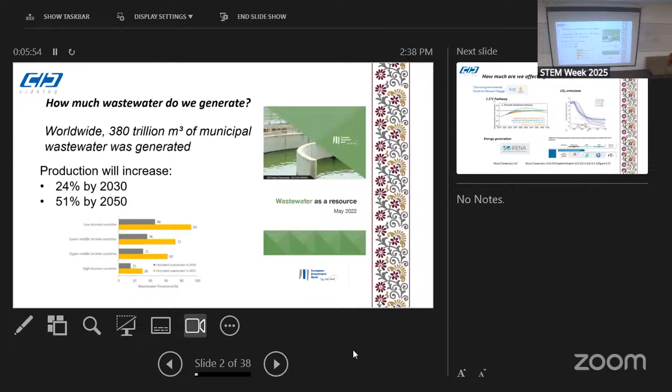Also, as you see in the document that was printed by the European Investment Bank, there is a change in the view of wastewater. We are accustomed to see wastewater as a problem, but according to this document, wastewater must be a resource rather than a problem. That's because we can obtain some benefits from the wastewater. For example, clean water, biogas, or energy, and also we can obtain nutrients. So this is a change of the point of view that is very interesting.

On the other hand, we're accustomed to hear about global warming, and it is a serious problem in our days. That's because of the production of CO2, and that's why the 1.5 centigrade pathway was implemented. There are some strategies in order to maintain the increase in the temperature of the planet at only 1.5 centigrades. That's the goal.

So we are implementing many strategies in order to decrease the CO2 emissions. One of these strategies is the implementation of alternative energies. According to the International Renewable Energy Agency, in 2030, 68% of the electrical energy must be produced using alternative energies. And in 2050, 91% of the electricity will be produced using alternative energy.

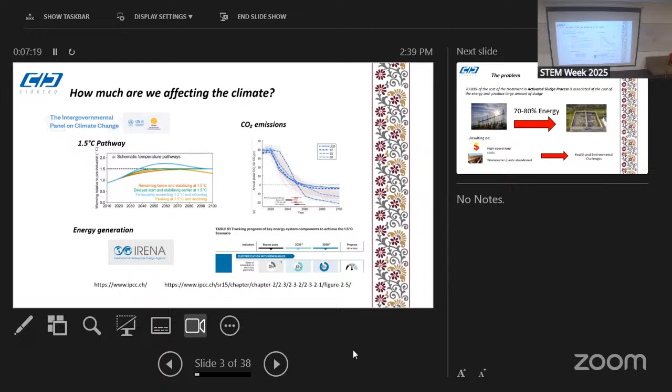Well, coming again to the problem of wastewater, there are many processes to treat the wastewater. But one of the main problems is the use of energy, because these processes require energy. For example, in the case of the activated sludge process, which is the most common process all around the world.

The cost of the treatment is associated with the cost of the energy, because between 70 and 80% of the cost of the treatment is associated with the cost of the energy required in the biological reactor. And this is important because this is the most popular wastewater treatment process in all the world. So that results in high operational cost.

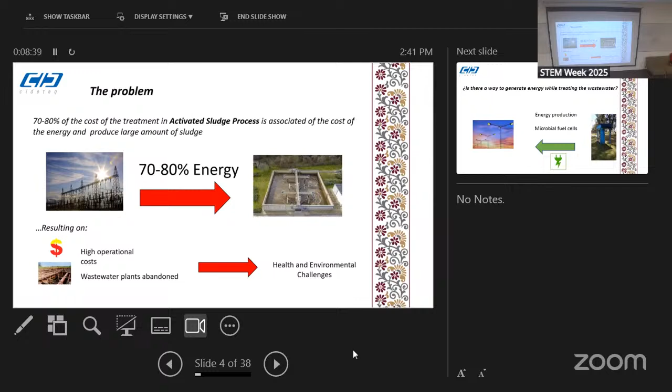For example, in Mexico, there are some wastewater treatment plants that are abandoned because they don't have the budget to operate. And that's a problem. We have health and environmental challenges. So the question is, is there another option, another friendly option to treat the wastewater? And the answer is yes.

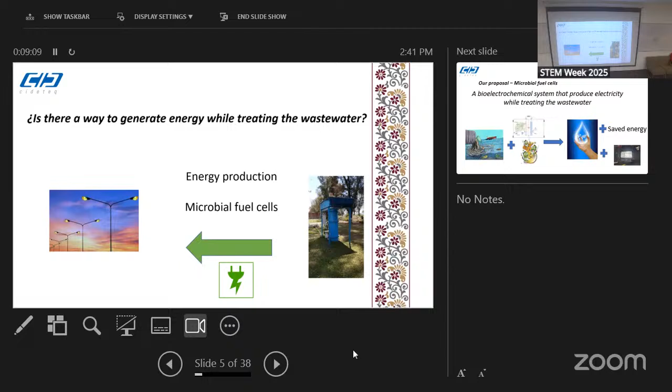I would like to show you a new approach that we are developing, a disruptive approach that is called microbial fuel cells. The microbial fuel cell is a bioelectrochemical system that can treat the wastewater, that is, eliminate the contaminants in wastewater, but also produce energy at the same time directly. That is, you place the wastewater in contact with a reactor.

The MFC is a biological system, so you have a microbial population, and the products are clean water and saved energy, because this process does not require a lot of energy. It's not intensive in the use of energy. And in fact, this process can produce a certain quantity of energy directly from the process.

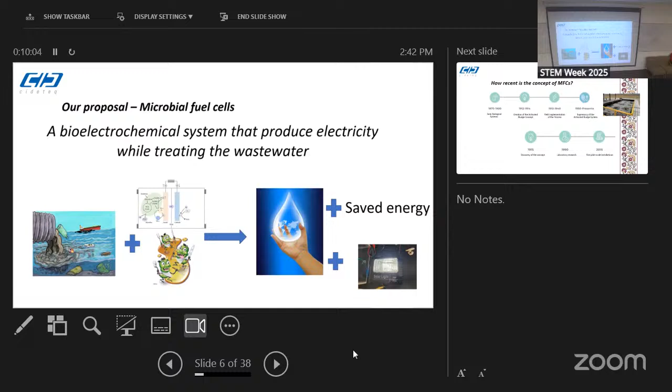Comparing this new concept of microbial fuel cells with the typical activated sludge process: the activated sludge concept was developed in 1914, and since then it was implemented in many applications in the field. And since 1950, it is the most popular wastewater treatment process in the world. Indeed, now it is the most popular.

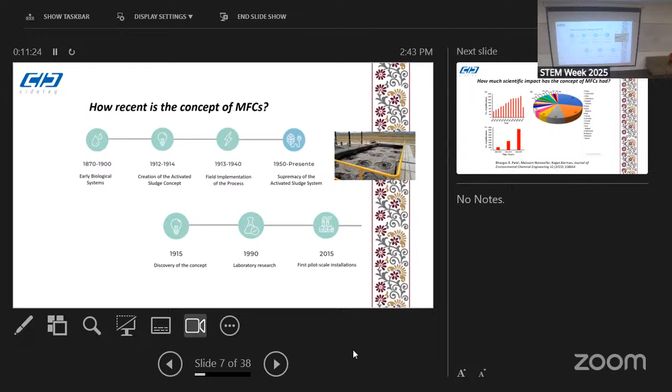And in the case of the MFCs, the concept was discovered about 1915, but it was not until 1990 that research on this concept began. And the first pilot scale installations using MFCs were in 2010 to 2015.

Talking about the scientific impact of microbial fuel cells, as you can see, in the last years the number of publications increased, for example, from 400 in 2010 to 1,400 in 2021. That is a big increase.

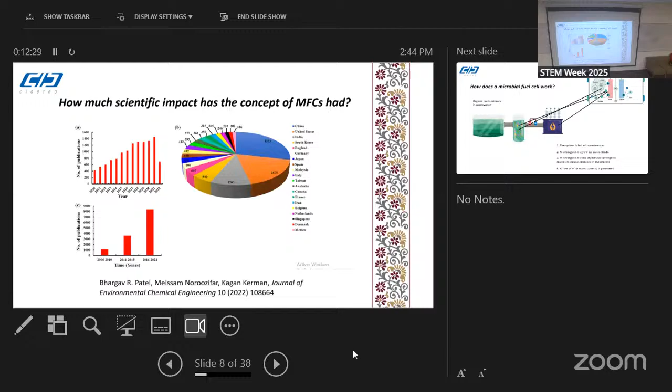Talking about countries, the country ranked number one doing research in this concept is China, followed by the United States and India. Here in pink color, we are in Mexico, with about 186 scientific papers.

In the anodic compartment, we have the anode. In the cathodic compartment, we have a cathode, and they are separated by a membrane. A biofilm grows on the surface of the anode, and then this biofilm degrades the substrates, in this case the organic contaminants contained in wastewater.

It produces electrons as a byproduct. The electrons are transferred to the surface of the anode, and from the anode flow through an external circuit to the cathode, and in the cathode there is a reduction reaction using the electrons produced in the anode, and the circle is closed. In this way, we degrade the contaminants in wastewater and also produce an electrical current at the same time.

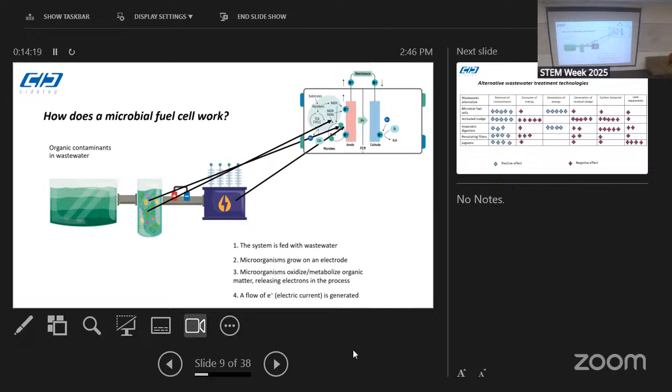Comparing this alternative with the traditional wastewater treatment systems, the microbial cell removes the contaminants. You can see the positive and negative effects. The microbial cells remove the contaminants in wastewater in an efficient way, consume low quantities of energy, and generate energy, not a lot, but they generate energy. They generate a low quantity of sewage sludge, have a low carbon footprint, and require low quantities of land.

Compared with the typical waste activated sludge process, that is efficient to remove the contaminants, but the problem is that it requires a lot of energy because of the aeration, generates a high quantity of sewage sludge. It has a high carbon footprint, and that's a problem.

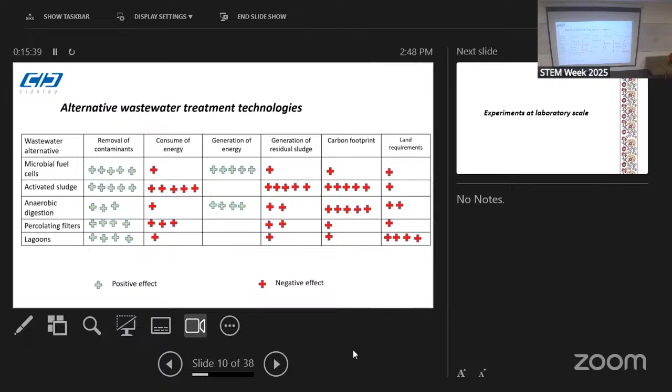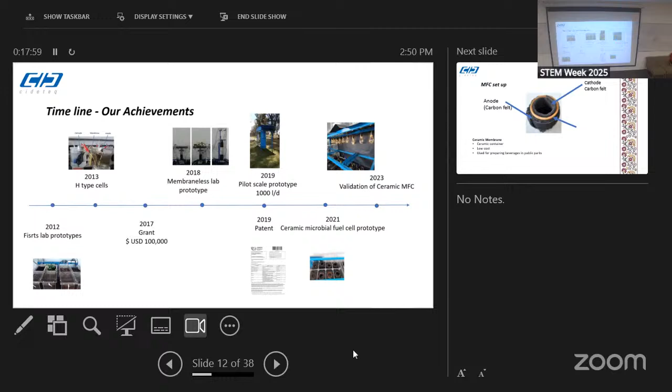Okay, this is a typical MFC. I'm sure that you have seen this ceramic before. Have you seen the carrito that is used to prepare beverages in public places and in public parks? We have used this container as a membrane. That was the idea, because we tried to show that it really works. So we have chosen this material.

This is a local ceramic, and on the outside of the ceramic we place carbon felt. This is a conductive material. And inside we have also placed carbon felt. And this is the typical cell with the ceramic, the anode, and the cathode.

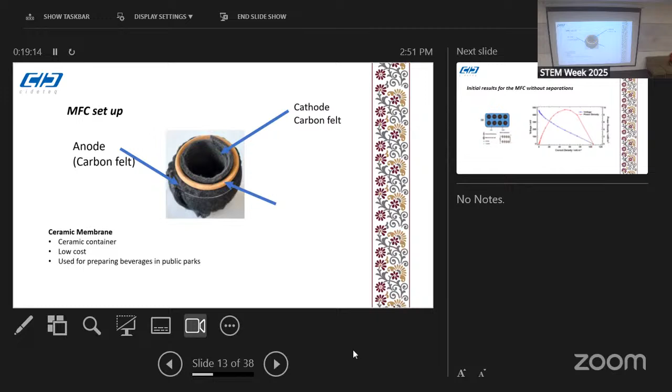Well, we have experimented with these MFCs, placing several MFCs in a module. For example, in this case, we placed eight MFCs in a module, and this is the most important tool when we are evaluating the performance of the MFCs. This is the polarization curve. We obtain this curve placing different physical resistances in the system, and then at equilibrium we measure the voltage and the current that we generate, and by applying different resistances, we can obtain this polarization curve, and also that red curve. That is the power curve, and it indicates the highest power that can be obtained with this system. This is the important data.

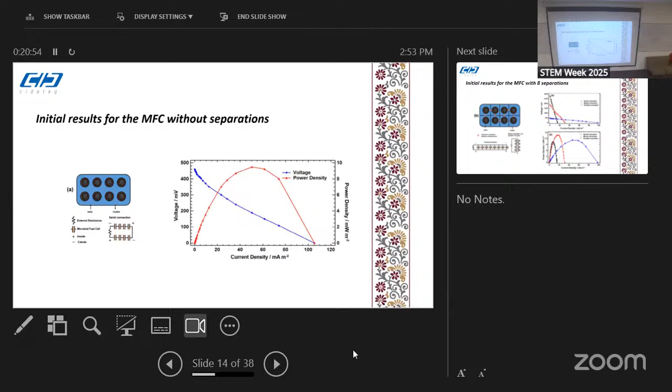If we change the arrangement, we change the cell, we can evaluate the power that we can obtain from this arrangement. That's why it's very important. We changed this arrangement. In the last case, we placed the 8 MFCs without any separation, and then we used a separation. Each one of the MFCs was separated, and we also evaluated the power production.

And so we modified the arrangement of the electrodes, and this is the initial power obtained with the initial arrangement. We modified the MFC, and we obtained a better performance. In this case, the power generated is 4 times the initial value.

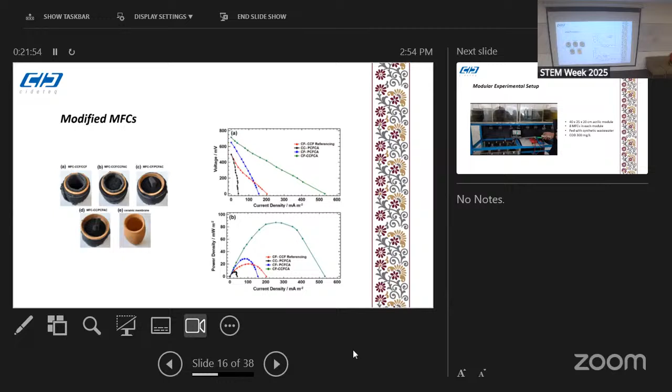This is the experimental setup. We have placed the MFCs in an acrylic module. We place 8 MFCs in each one of these modules with different arrangements, because we're trying to evaluate the effect of the arrangement on the performance and on the energy production. We feed synthetic wastewater that we prepare in the lab, and this wastewater contains about 300 milligrams per liter of COD. COD is chemical oxygen demand, and we can measure the content of organic contaminants using COD. In this case, this value is typical of any sanitary wastewater. That is the wastewater that we generate in our houses.

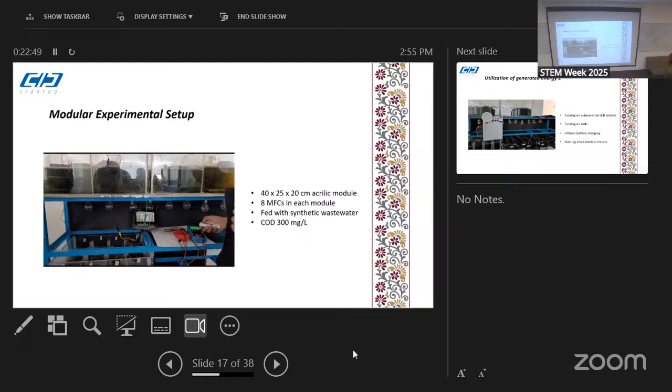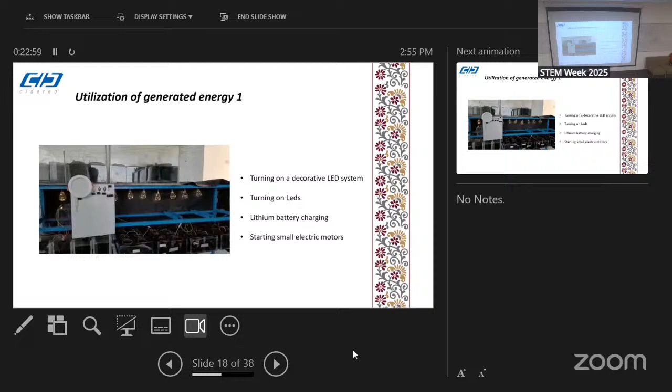Then we try to use the energy. As you see, we can turn on this LED decorative system.

We turn on some LEDs. This is an electronic device to charge a battery. We can charge lithium batteries to preserve volts, and also we can start small electric motors using the energy produced by the MFC system.

This is a second video. We have proved to light on several LEDs with different power requirements, because we like to prove the use of the energy. And as you can see, all of them were lighted on.

And this is a commercial LED lamp that you use in your house. This is the last video. Then we try with a commercial LED lamp. As you see, we can light it on. When we disconnect the wire, the lamp lights off.

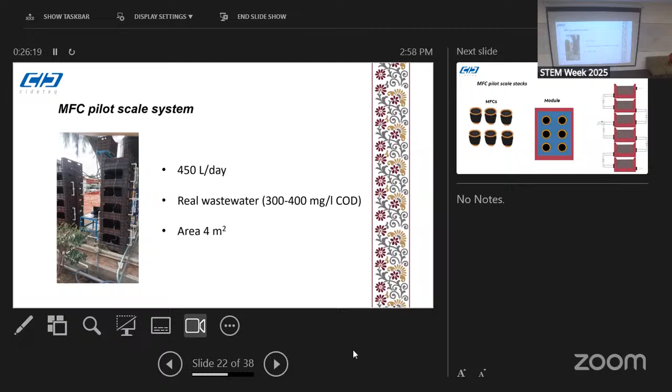So it's really a local system. We have collocated the MFCs inside the module, and then one module on the top of the others. And finally, we have a stack with 6 modules. Then we feed real wastewater in the top of the stack, and the water goes through the first module, the second, the third, and so on. And the effluent is in the bottom of the stack.

Each one of these stacks was designed to treat about 110 liters per day. And this is the value of COD removal. When we get the steady state, the removal is about 70 to 80% of the COD.

That this is a typical value of any biological wastewater treatment. That is, it works well as a wastewater treatment, using real wastewater. And the quality of the effluent is near the Mexican norm.

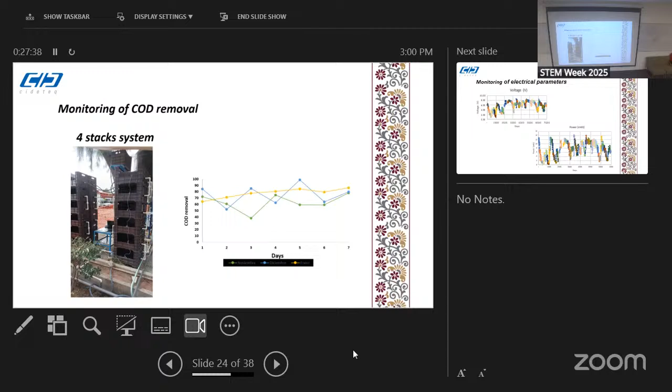We have also developed a system to obtain the electrical parameters. Every time we are measuring the voltage, the current, and the power generated by the systems. In this case, you can see that the voltage generated in the system is about 4 to 8 volts, and the power was between 4 and 12 milliwatts.

And now the challenge is to recuperate, to obtain the energy and not to lose so much energy in the system. The average voltage that we can obtain with this system is about 6 volts, and the power is about 8 to 10 milliwatts.

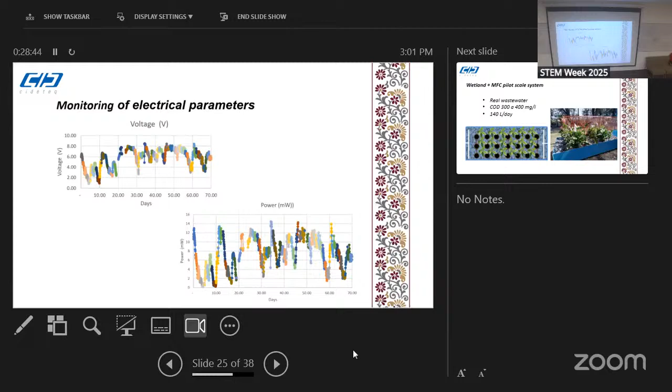Another system that we have built at scale is a combination of the MFCs with wetlands, using real wastewater with the same COD, and we have installed this wetland in a metal container. We have collocated 21 MFCs and 18 plants, different plants.

This system was designed to treat 140 liters per day. In this case, when the system reached the steady state, the COD removal is about 80%. That is, we can clean the water using this system, combining MFCs and plants.

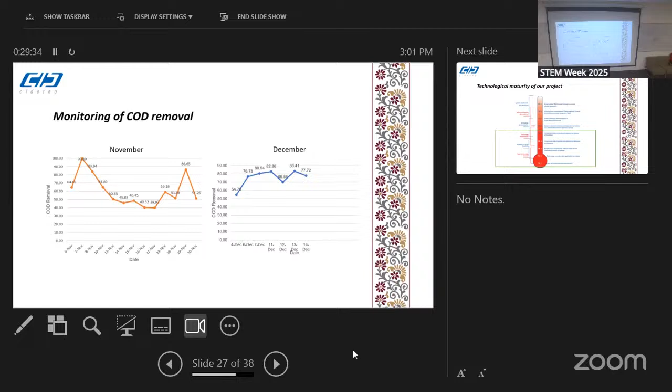We're doing basic research, but we're also doing applied research. This is the scale of the maturity of the technology that was designed by NASA. And in terms of technology, we think that we are in the middle, about TRL 5.

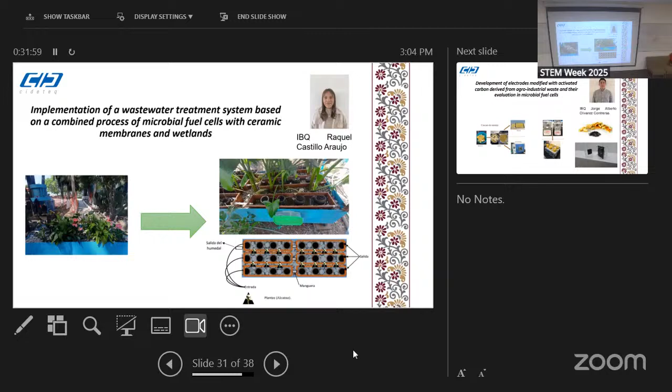For example, this is the case of Raquel. She is working with the MFC wetland system. As you can see, in this case, we have separated the MFC from the body of the wetland. That is because we would like to recover more energy, and we are trying different arrangements to see how the system performance changes.

This is the project, Jorge's project. He's working with the development of electrodes from organic waste. He's using orange peels to prepare activated carbon, and then using this activated carbon to prepare electrodes.

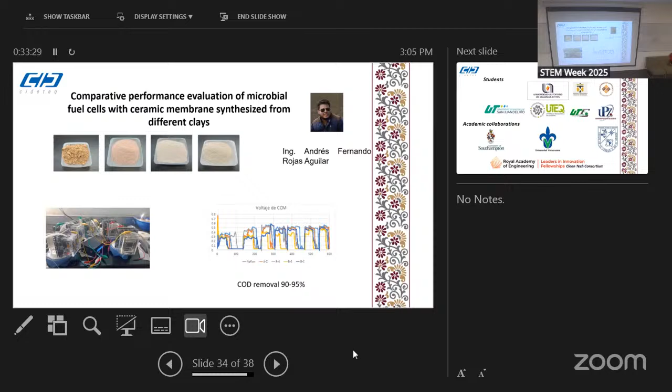Finally, this is the project of Fernando. Fernando is working with the production of membranes using different natural clays. This is the system of MFCs at cell scale, and this is a typical response of one cell. You can see the voltage generated each time the cell was filled. In all cases, the COD removal was between 90 and 95%.

We have received students from different universities, in Querétaro, San Juan del Río, Corregidora, Aguascalientes, Anáhuac University, and from different institutions. And we have academic collaborations with some other institutions.

We collaborate with Dr. Ioannis Ieropoulos of the University of Southampton. He is one of the most recognized authors about MFCs. With the Veracruz University, Querétaro University, and with the Clean Tech Consortium of the Royal Academy of Engineering.